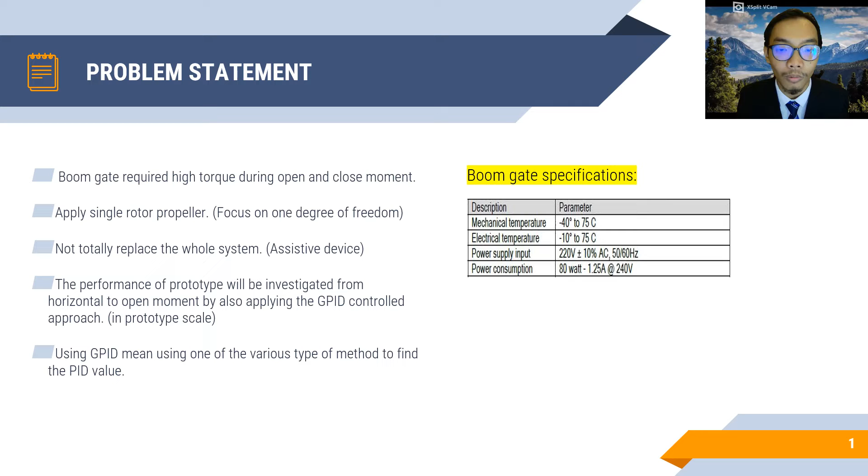Using GPID control approach means using one of the various types of method to find the PID value. To find the PID value, there are many methods such as the Ziegler-Nichols method, Cohen-Coon method, and genetic algorithm method. So in this project, we'll be just using one type of PID method to find the value.

The objective of this project, the first one is to study the application of PID on the boom gate system. We study through the PID value we insert into the system whether the PID value can give efficiency to the system. The second one is to develop an assisted boom gate. In this project, we create a model in a prototype scale rather than use the actual scale of the boom gate system due to cost.

The third one is to evaluate the performance of the assisted boom gate. This will be evaluated through the observation and reaction of the model prototype, and also through the serial monitor data from the Arduino.

So the methodology of this project will start with the conceptual design, and then we will proceed to the model and scale down of the project, and then to the selection of the material for our project if the material is suitable, and then we fabricate the project, and then we go through the programming and coding part, which will insert, test and simulate various PID values, set point, and also minimum and max RPM of the motor, since the method we use in this project is the trial and error method.

And then for the finalized system specification, we finalize the PID value, set point value, and also the minimum and maximum RPM of the motor. And then we see the behavior and reaction of the model system, and the result will be concluded in chapter 4.

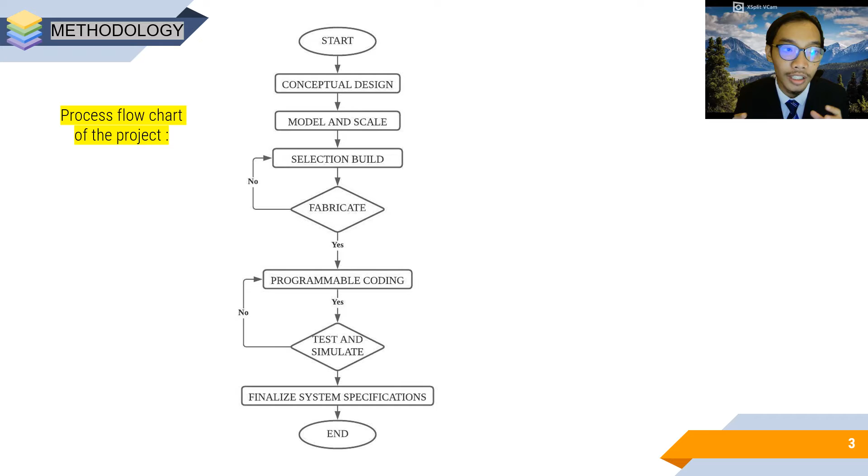We also sketched design B because of safety considerations. When we talk about the boom gate system, it will interact with users, especially cars, passing through the boom gate barrier. But for design B, the single rotor propeller must create the same high torque as design A, which means high forces and high electricity. We don't want that, so we choose design A rather than design B.

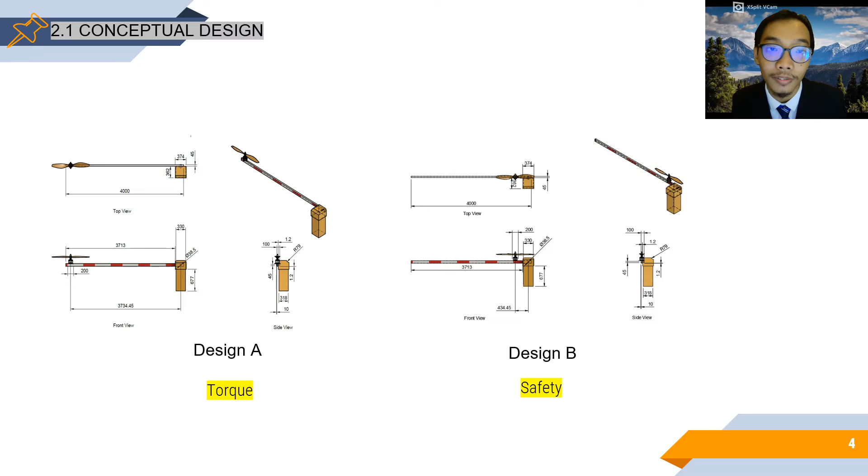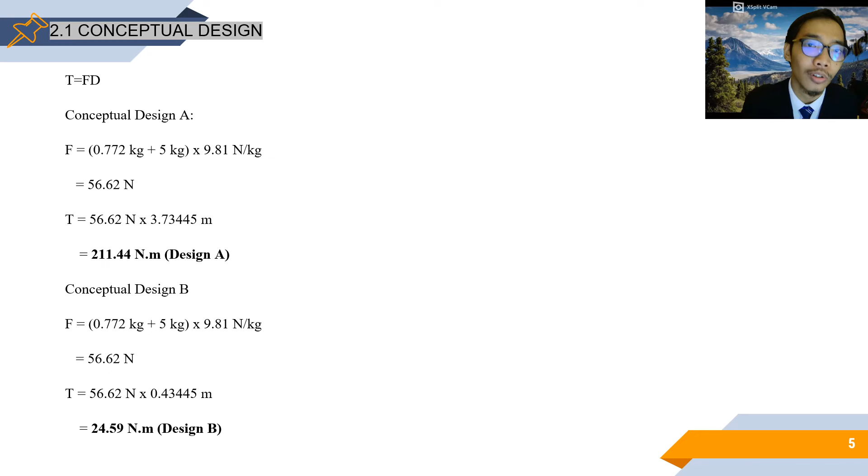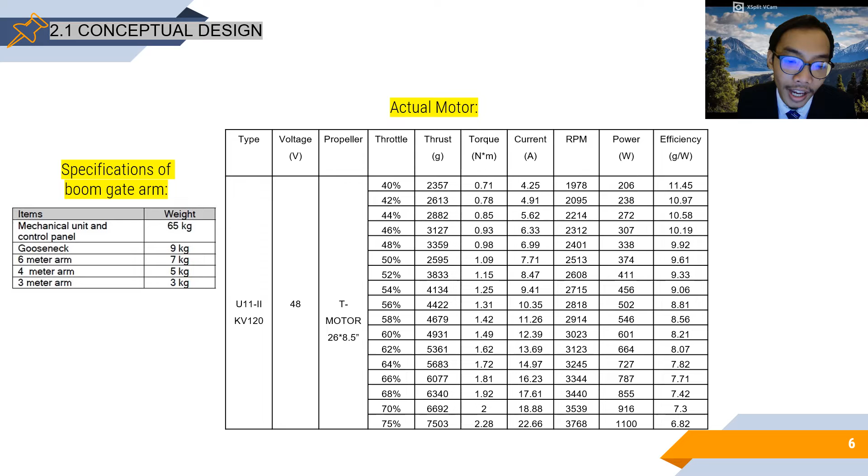Because if we just use throttle to ramp up the gate, the reaction will be aggressive, and maybe the current will increase. So with PID value, maybe the power can be decreased and the reaction of the boom gate arm will be gentle.

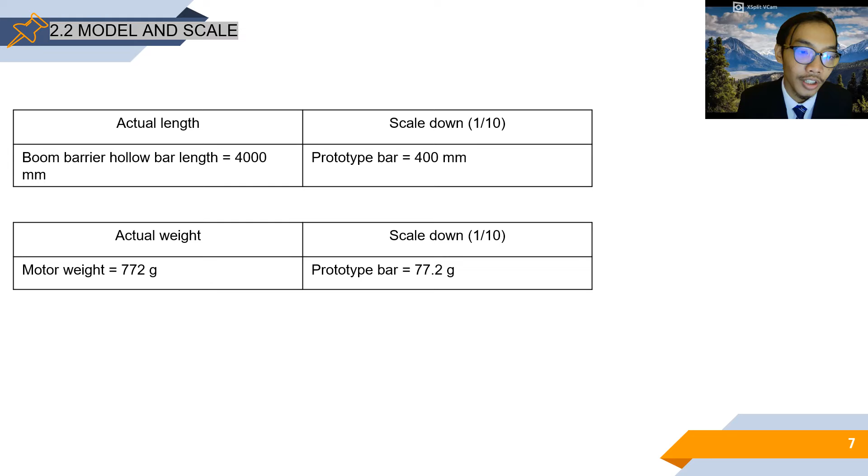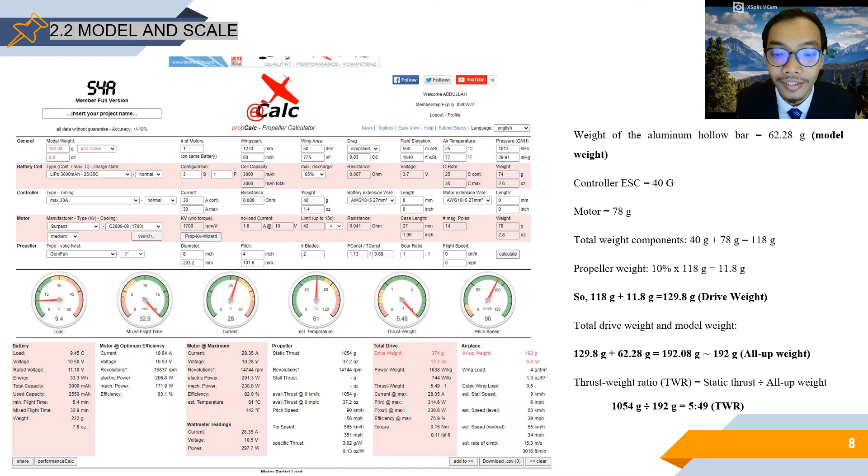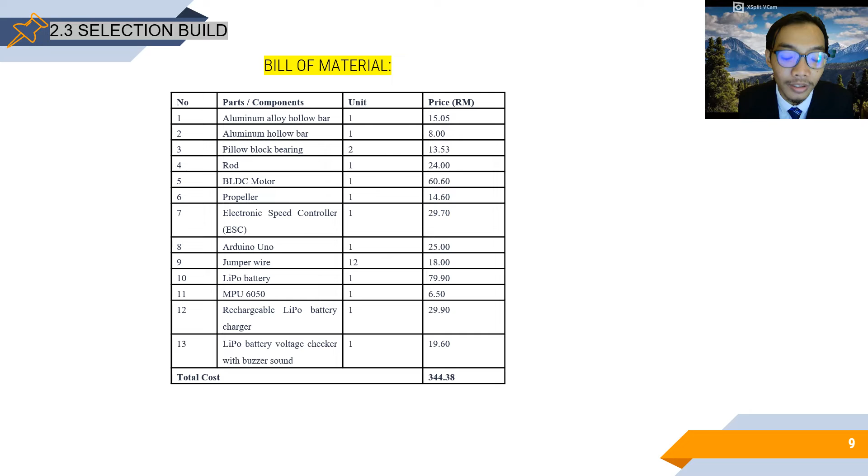For the selection of the components for my prototype, I use this eCalc calculator online to find the suitable components for my prototype. Based on this calculator also, I can see the thrust produced based on the model weight of my prototype. This is the bill of material for this project. The total cost to build this model prototype is about RM344.38.

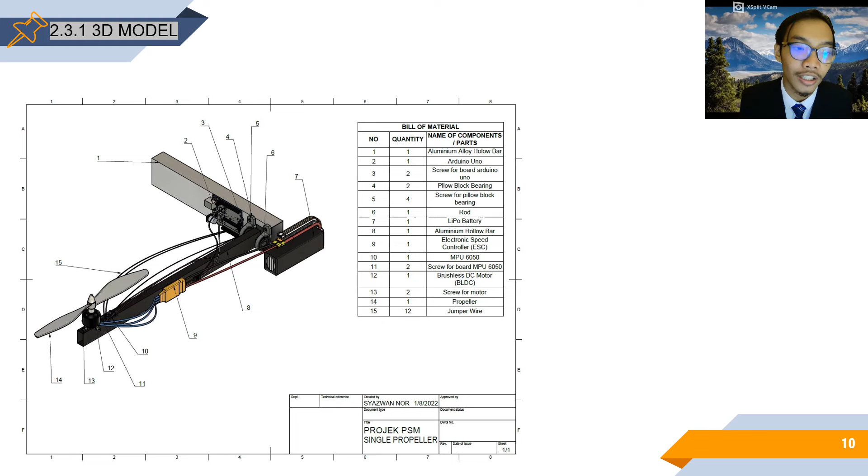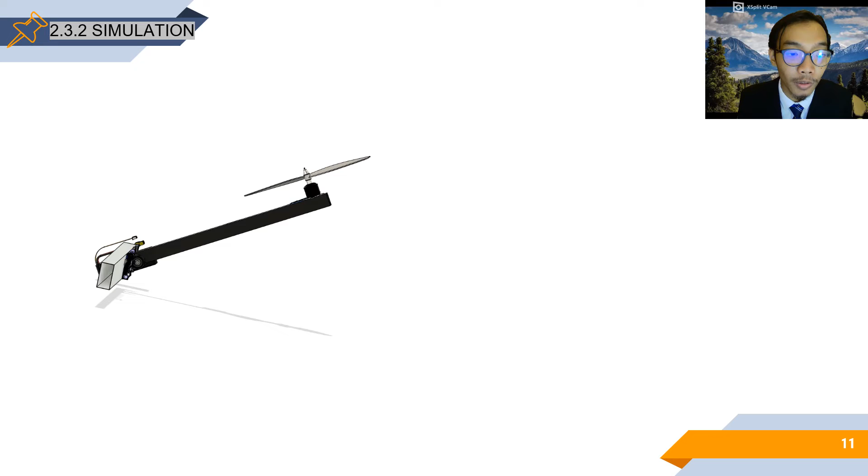This is the 3D model of the prototype. There are 15 components that are used in this model. This is the animation of the model system. The boom barrier bar will go up to the desired angle that we want. This is the schematic diagram of this prototype.

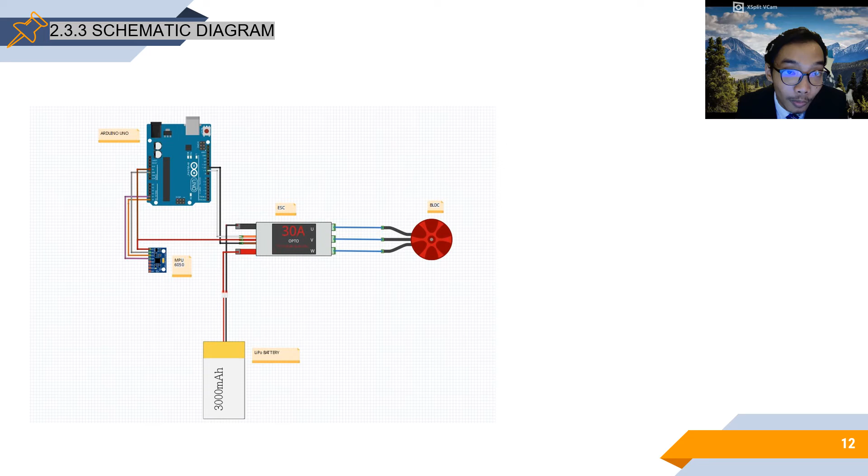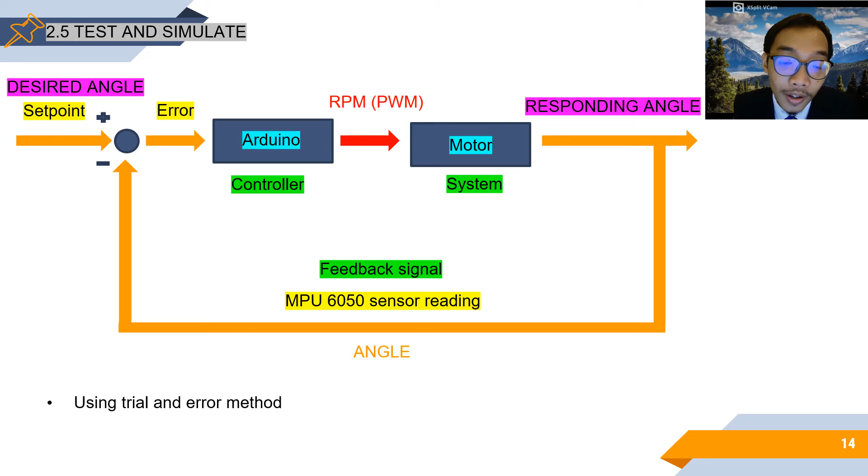In this part, test and simulate, we set the set point as the desired angle that we want, and then the angle will go through the Arduino controller, and the controller will power up the motor with a pulse width modulation value, but we don't know how much RPM of the motor is needed for the angle value. So the sensor MPU6050 will send a feedback signal back to the system for the correction, and then we know the system's actual RPM value for the actual angle.

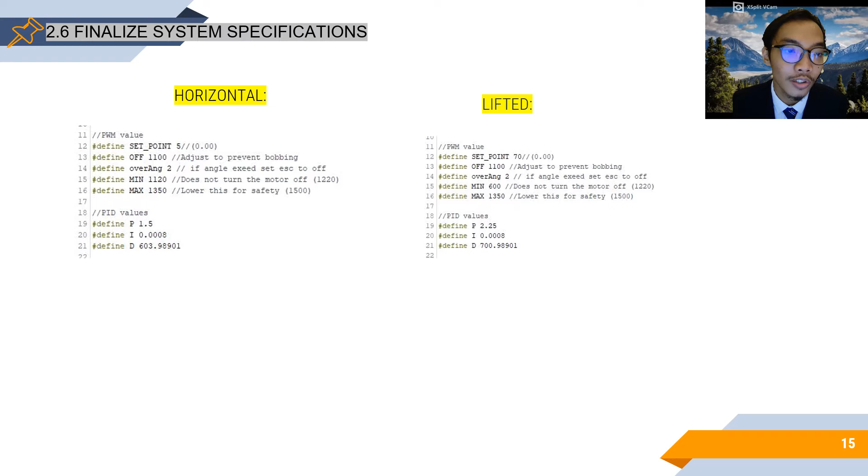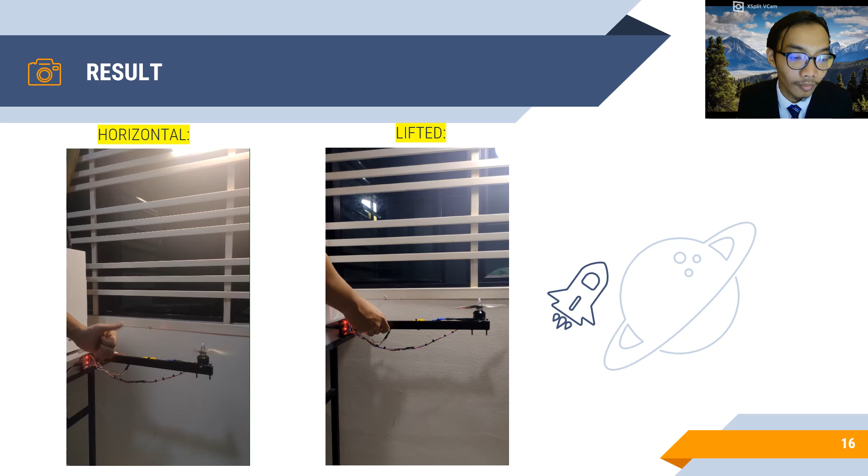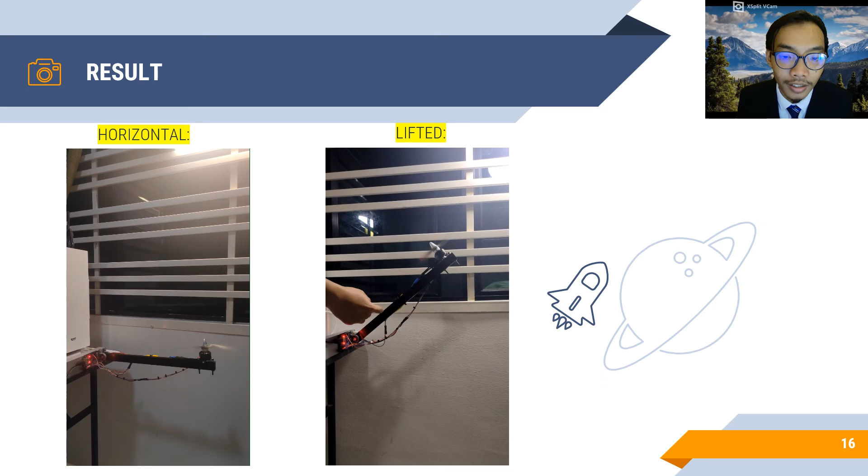And this is the final system specification for my prototype. This is the PID value that is fixed for the horizontal part and also for the lifted part. So this is the result of our experiment. This is for the horizontal part. As you can see, the motor stabilized at the position, the desired angle that we insert. And this is for the lifted part. As you can see, the motor lifted up to the desired angle that we want.

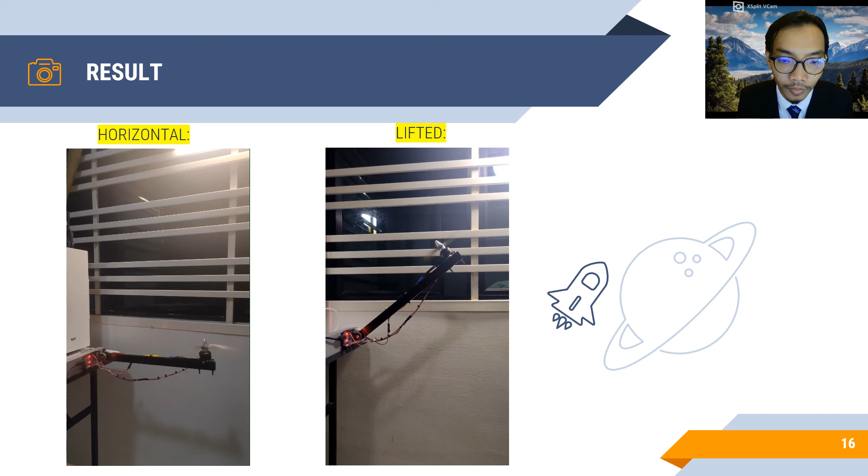So, discussion part: the difference in PID values between both systems is due to the thrust produced also being different. This is related to resultant force, because in kinematics, it deals with forces in axes. So, if the part was horizontal, the system does not have x-axis force, it only has y-axis force, and also the opposing force, which is thrust. But in this case, the error angle has become a resultant force, which has components x and y, and the thrust of the system is not produced directly vertical, it is actually constrained to an angle, which means it has 2 degrees of freedom but constrained to 1 degree, so it cannot be treated equally.

So for the lifted part, even though the minimum pulse width modulation value inserted is low, the desired position angle set point is achieved due to the PID calculation in the system. This can be observed based on the motor RPM for the lifted part. The minimum motor RPM is 600, but it has achieved the desired angle that we want. For the horizontal part, it shows that the PID value can make the system stabilize.

And there's also a disadvantage in this project: when the voltage of the battery drops, it affects the whole performance. This means that the PID value, set point value, and speed must be changed according to the actual voltage value. And below is the graph from the serial monitor data from the Arduino. It seems that the graph is stable based on the angle and the RPM of the motor that has been produced.

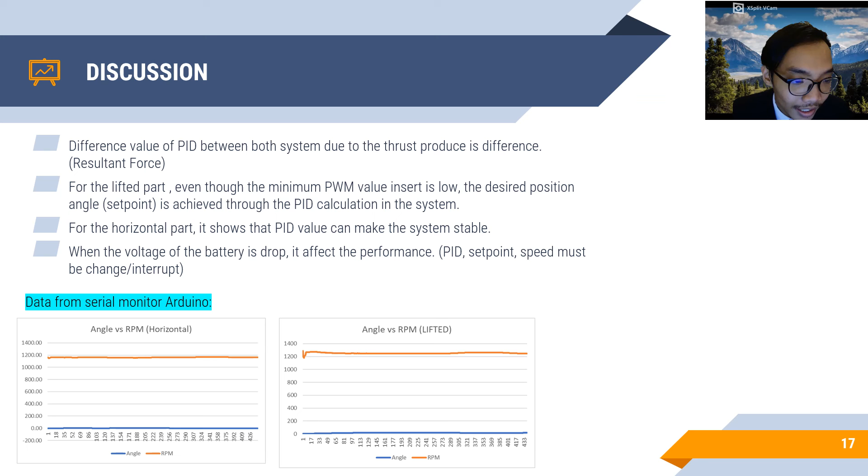For the conclusion of this project, the PID value can increase the performance and efficiency of the system. Based on these two videos, the arm bar generally achieved the desired angle. If we use just throttle to ramp up the system, the arm bar will react aggressively compared to with PID. With a suitable PID value, the desired position can be achieved even with a lower motor RPM. Based on the lifted part video, the minimum RPM of the motor is just 600, but it can achieve the 70 degree desired angle. And based on the result, the motor and propeller can be applied to the real system using a suitable PID value.

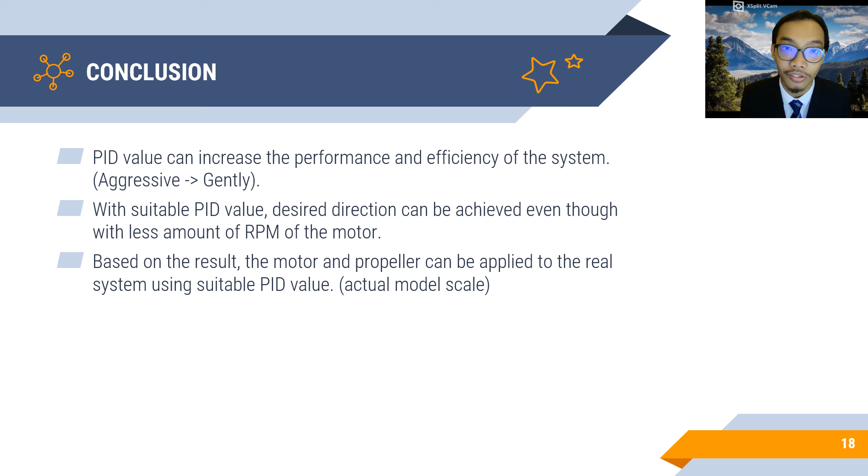For suggestions for this project, I suggest that we change the LiPo battery to a fixed power source to obtain a fixed amount of voltage. Next, I suggest designing the safety aspect for the motor and propeller, since it will be applied on the boom gate system, which will interact with users. And third, I suggest that we apply it for both movements, which are open and close.